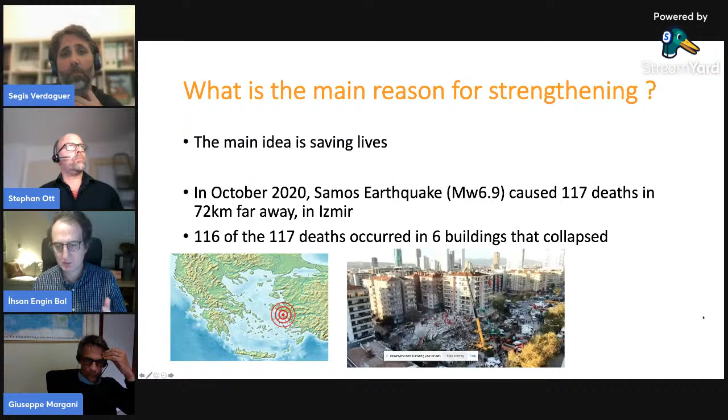I have an example here, an earthquake that happened a bit more than a year ago in October 2020 in Samos, very close to Samos Island, a Greek island in the Aegean Sea. Magnitude 6.9. It caused, I think, only one death in Samos, but 72 kilometers away in Izmir, Turkey, it caused 117 deaths, and 116 of those 117 deaths occurred in 6 buildings. They were buildings constructed in the same period, between 1990 and 1998, all 7-8 story buildings, reinforced concrete, very close to each other in the same neighborhood. So all these 6 buildings created the total death toll.

And the focus was not on Samos Island but on Izmir, although it was far away from the epicenter. These 6 buildings are among 200,000 buildings, so it's really a very, very small amount in the entire building stock. But they write the history because these 6 buildings are enough to create a catastrophe and cause 116 deaths. So at the end of the day, why was Izmir in focus instead of Samos? Well, it's very simple, because of the death toll.

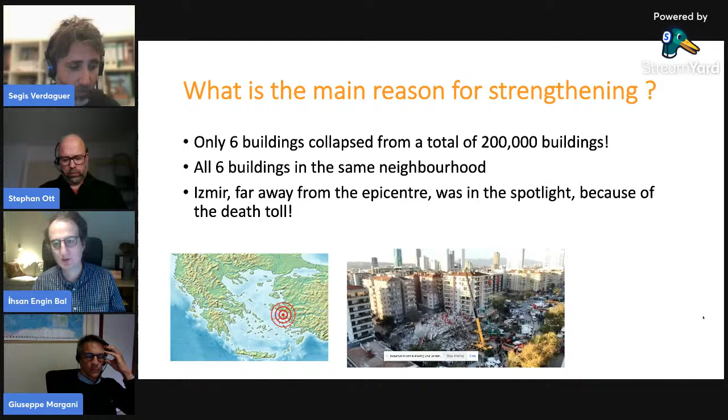So the basics, if we go back to the basics of earthquake engineering, the main idea, if you isolate everything else, our idea is to save lives, period. But in order to save lives, we have to prevent collapse. So preventing collapse, if you look at the whole seismic safety issue from earthquake engineering perspective, and if we have a list of priorities, on top of the list by far is preventing collapse. So the idea is that in order to prevent collapse, we need to strengthen buildings. We cannot rebuild all the buildings.

So it's a very similar problem to energy efficiency. The problem is not new construction, the problem is the existing building stock that is huge and has many problems. So transforming this existing building stock is really the core of creating a seismically safe Europe. In order to do that, we are stuck in all the countries, we are stuck also in the US.

It is the same problem: how to find the bad apples, the rotten apples. From 200,000 buildings, how to find these 6 buildings that will collapse. Of course, it's almost a mission impossible because it needs an incredible engineering effort.

So maybe instead of doing that, we should twist the problem and just do no regret measures. No regret measures need less engineering effort, but at the end of the day, you prevent buildings from collapse. Even if it's not perfect, it's a no regret measure because it saves lives.

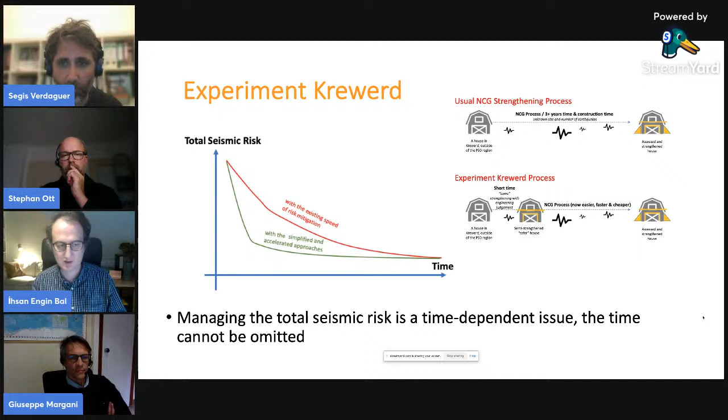So they know what is needed. It was much cheaper and faster, and people were happy, because if people waited for the strengthening through normal procedures, they would wait at least 3-4 years. But we were able to do it very fast.

So the discussion is that we need a twist in this earthquake resilience and earthquake resistance issue. We need to focus on collapse vulnerability. We should use no regret strengthening measures. We should be able to spot individual regions, buildings, or building groups and prioritize them against collapse. And we should also be able to use better tools in strengthening, use emerging technologies, and of course, all this can be combined with deep renovations.

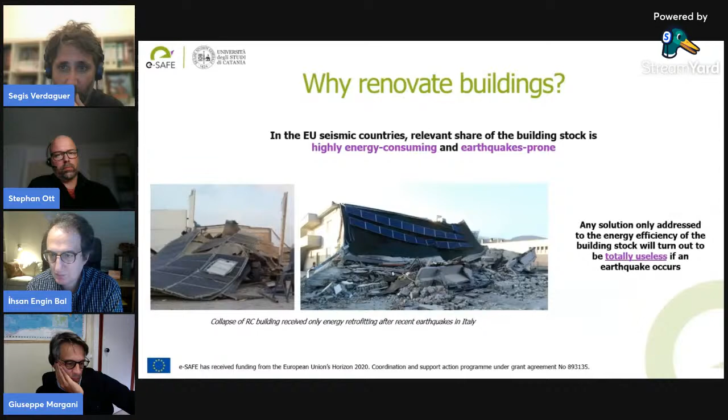In earthquake-prone European countries, renovation actions aiming at improving both the seismic resistance and energy efficiency of the existing building stock are strongly needed, looking at the resilience of buildings against earthquakes as one of the main values of a sustainable city. In this framework, the e-SAFE project is developing and demonstrating new technical solutions for the seismic and energy renovation of reinforced concrete frame buildings.

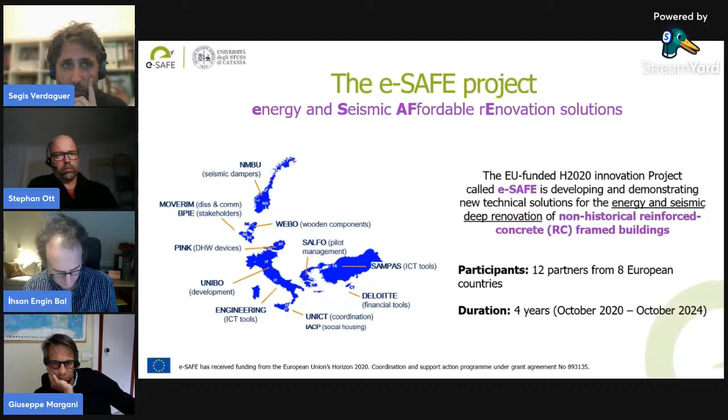The project has received funding from the European Union's Horizon 2020 Research and Innovation Programme. It started in October 2020 and will run for a total of 4 years. 12 partners from 8 European countries contribute to its implementation.

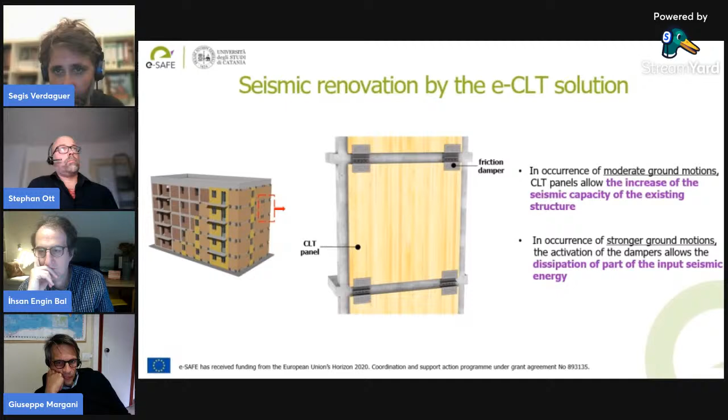The e-CLT system is the seismic technology that drives the e-SAFE retrofit innovation. It consists of the application of cross-laminated timber panels on the outer wall of the existing building by means of innovative energy dissipation devices. The aim of the system is twofold: for moderate ground motions, CLT panels allow the increase of the seismic capacity of the existing structure; instead, for strong ground motions, the dampers dissipate part of the input seismic energy. These two features of the e-CLT system allow the reduction of the storey demand of the structure and consequently the reduction of its damage.

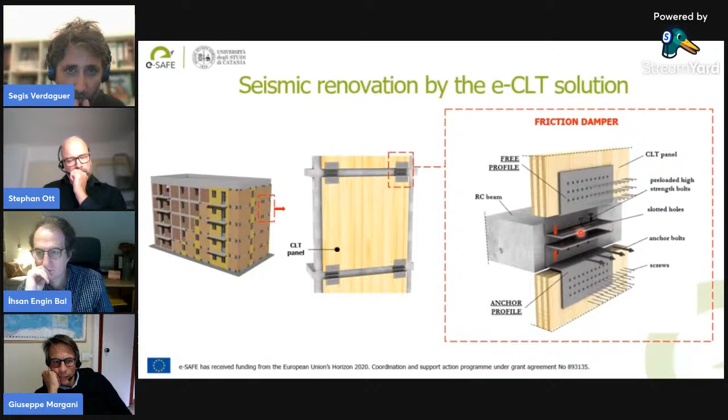The dissipative device is a friction damper. It consists of 2 steel profiles which connect the CLT panel of 2 consecutive floors with the existing interposed RC beam. One profile is connected to the RC beam by anchor bolts. The other profile is provided with slotted holes and is connected to the first one by pretensioned high-strength bolts. During an earthquake, when the force transmitted by the damper attains the value of the design friction force, the upper profile slides on the bottom one thanks to the slotted holes, thus dissipating seismic energy.

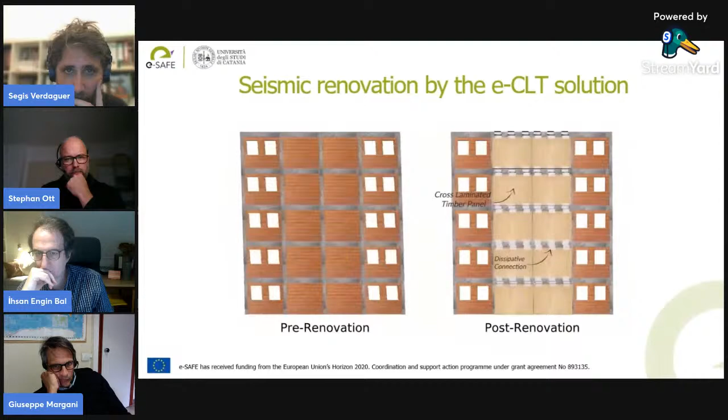The energy dissipation by friction ensures the durability of the structural efficiency of the damper even after seismic events, avoiding the need for its removal and replacement. The activation of the damper by a predefined force also enables control of the internal force on the CLT panels, which can be designed to avoid their damage and the need for replacement after a seismic event.

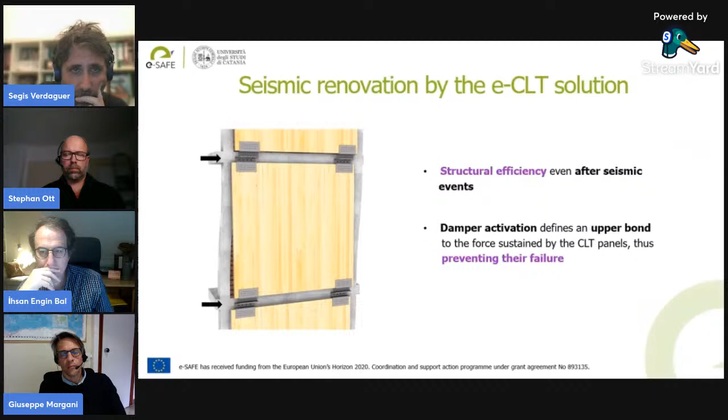The e-CLT panels are conceived to be prefabricated and thermally insulating, and to be combined with non-structural panels which are applied to the windowy walls and provided with high-performing windows in replacement of the existing ones.

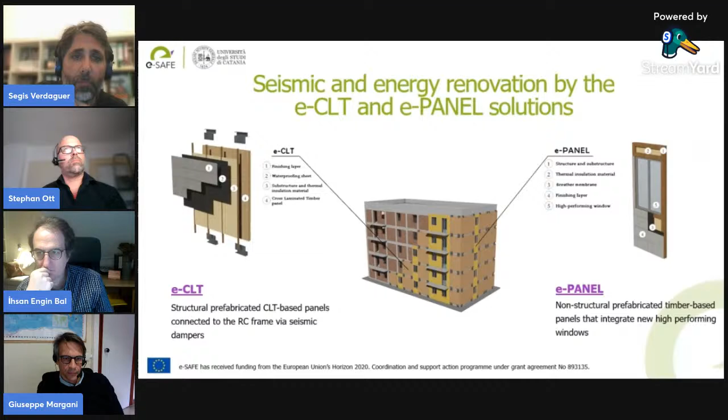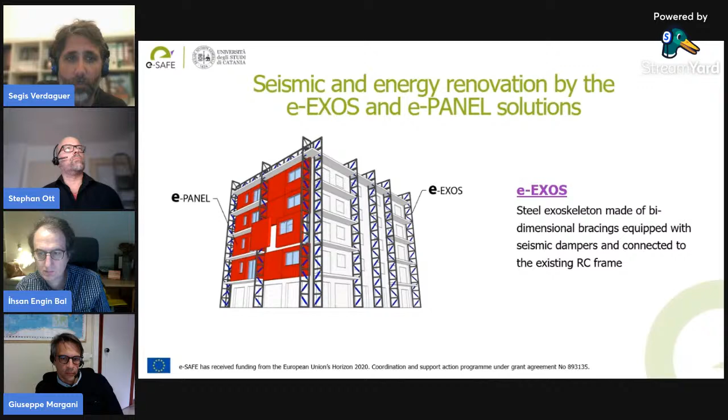If the e-CLT technology is not applicable or is not sufficient to achieve proper levels of seismic improvement, the e-EXOS solution can be adopted. The system provides for connecting an external steel exoskeleton equipped with seismic dampers to the existing RC structure.

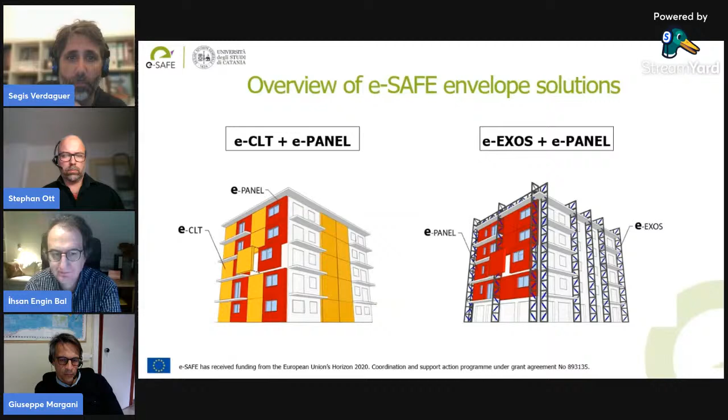The result is a new external shell for the existing building that acts as a seismic resistant and energy efficient skin, and allows minimizing the occupants' disturbance and reducing cost and time for implementation.

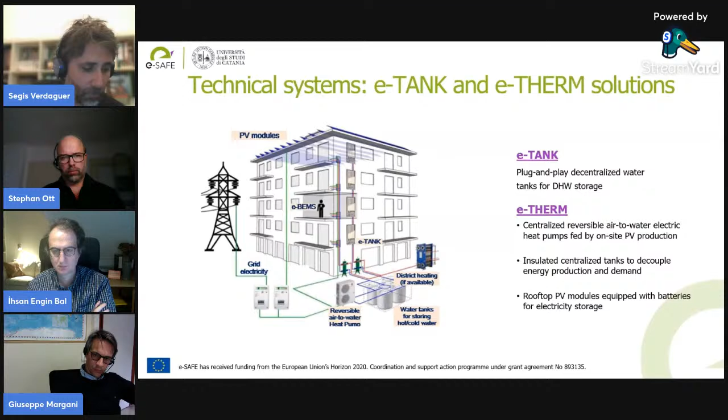New technical systems are also combined with the e-SAFE envelope solutions to reduce fossil fuel consumption and maximize energy production from renewable energy sources. The systems include plug-and-play decentralized water tanks for domestic hot water storage, reversible electric heat pumps fed by on-site photovoltaic production, and insulated centralized tanks to decouple energy production and demand.

So, a very interesting solution also from the e-SAFE project.

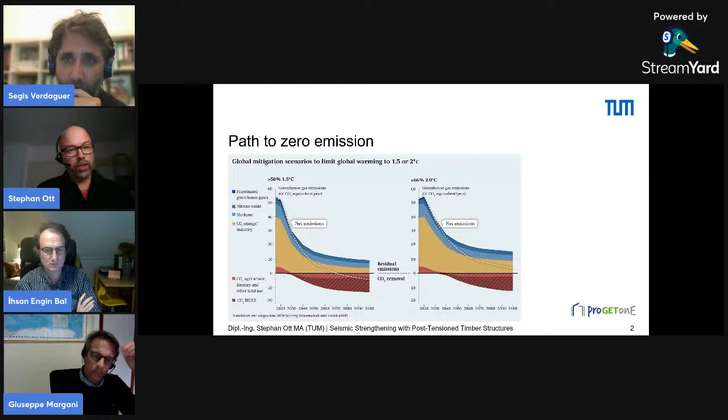There are two strategies. One is, as İhsan Bal already said, to renovate our building stock to avoid destroying a lot of values and materials which are already out there. The other is that we have to choose good solutions and the most efficient structural components and materials to do this.

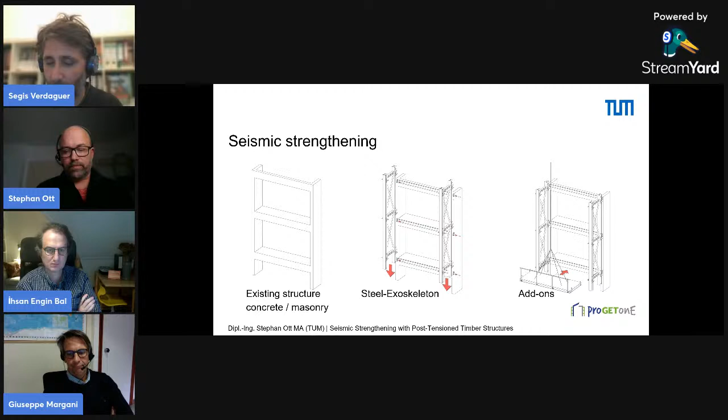The structure is mainly for the improvement of the seismic safety of the building, and then these other components increase the energy efficiency of the building and also give additional space or additional value, increasing the floor space for the inhabitants and making the building more valuable.

But when we talk about these solutions made from steel or aluminum, they are partly very good in structural terms, but on the material side and the environmental impact side, they are less optimal. So we thought about some different solutions, and I will show you now these post-tensioned cross-laminated timber structures.

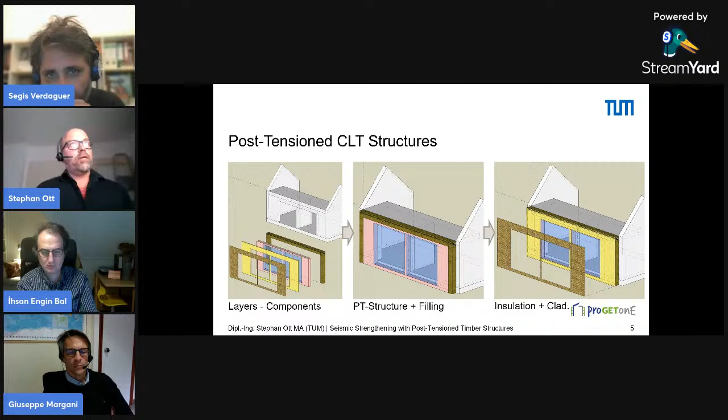First of all, this is a two-dimensional variation of these post-tensioned structures, and it consists of a frame which is put in front of an existing wall of a building. There is a red infill from insulation material, and you see also these post-tension rods connecting the columns with the beams. Then you can add, in the final stage, some additional insulation and cladding according to your requirements for energy efficiency.

These structures could also be three-dimensional, so that you really have the value of additional space - they are not only two-dimensional frameworks, they are really spatial structures here, consisting of CLT elements or panels orthogonal to the existing structure.

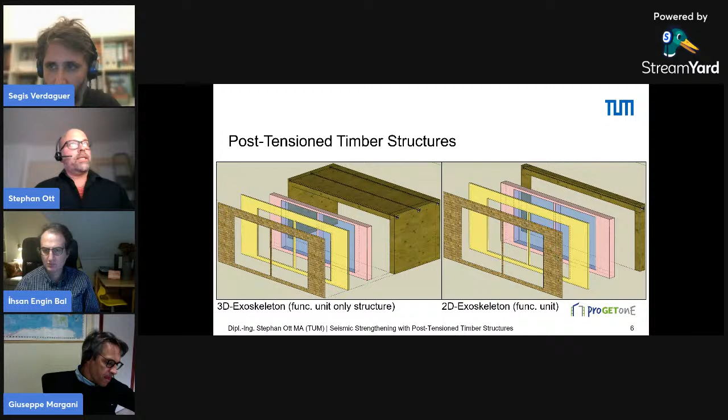And then there are also other components added, like the infill for the windows or for the parapet for balconies, or an insulation layer and additional cladding of the facade.

We had several hypotheses to examine these CLT exoskeletons, and we claim that they are low carbon components, additionally having the seismic strengthening exoskeleton function. I will not focus on the seismic strengthening function, but more on the low carbon issue.

There are some other articles out there about the seismic strengthening capability, so you can find them on the ProGETonE homepage and have a look at this.

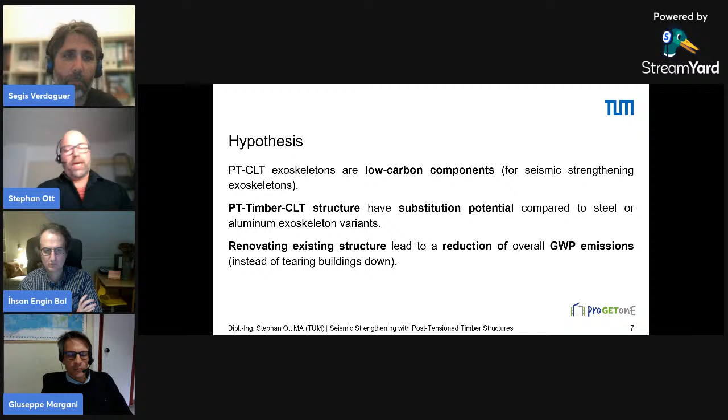We will also show that there is a substitution potential compared to steel or aluminum exoskeleton variants for these post-tension timber CLT structures, and that renovating existing structures leads to an overall reduction of global warming potential, instead of tearing down buildings and building them entirely from the ground up.

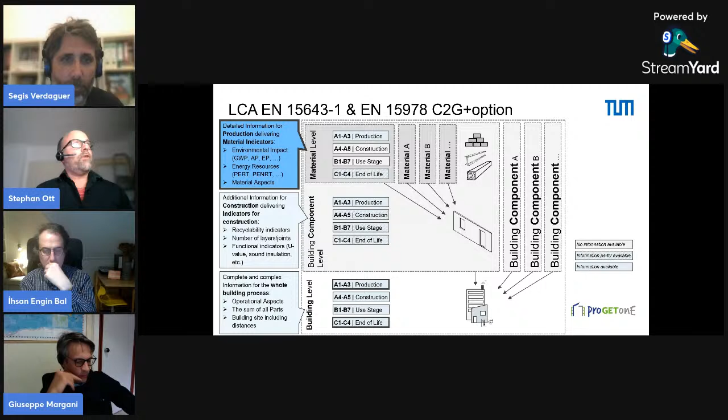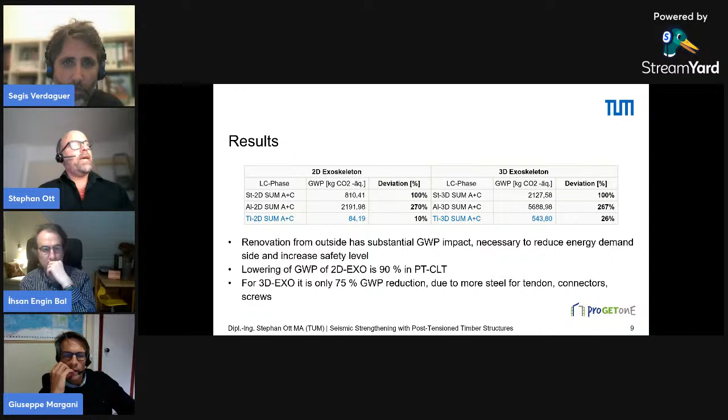So we did this life cycle analysis, mainly with the focus on the material indicators for the production of the material and for the end of life of the materials. We excluded the construction stage and also the use stage because the data is less available there. And then we found out that we can achieve a reduction of about 90% for the 2D exoskeleton and up to 75% for the 3D exoskeleton made out of timber post-tensioning structures.

Yeah, and that's it for the overview. And now I'm open for some questions. Thank you very much, Stefan.

So now we are starting the roundtable. I would have several questions, and if any of the viewers have any question, you can put them in the comments. These are open questions, so all of you can answer.

The first one will be, what are the differences between low and high seismicity zones in Europe in terms of practical implications of seismic strengthening and renovation? So who wants to answer this question? Well, I can step in, but maybe also Giuseppe can say things because it's also part of eSafe, the moderate and high seismic regions. Well, I think the main thing is the seismic demand, of course.

If the seismic demand is really, really high, well, we have pre-code buildings. Pre-code buildings have no or very low level of seismic loads considered during the design. So if you go to no-code or pre-code buildings, basically you don't have much difference within Europe because they are all designed under the dead load, the self-weight. So in that case, if you are in a very high seismic region or in a very low seismic region, basically you get more or less the same section dimensions.